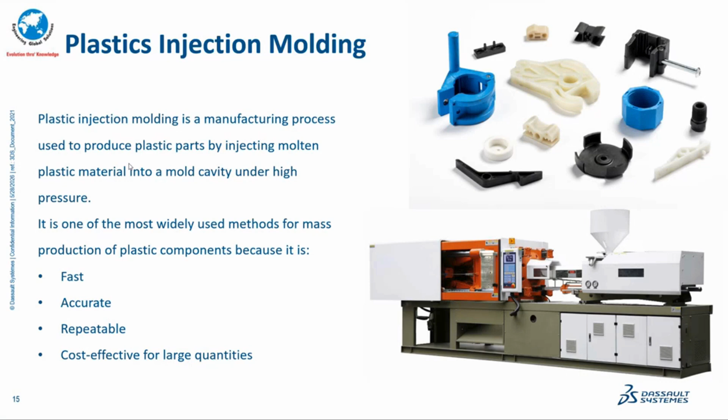What is plastic injection molding? Plastic injection molding is a manufacturing process where molten plastic is injected into a mold cavity under high pressure, cooled and solidified to form precise, durable parts. It is widely used in automotive, medical, electronics, packaging, and consumer goods industries because it enables high volume production with consistent quality and tight tolerances.

It involves various processes in mold design. A well-designed mold reduces defects and shortens cycle time. Material preparation directly impacts part quality and consistency. Uniform melting avoids short shots and flow defects. Injection is where design meets reality.

Precision here defines the final part. Efficient cooling reduces the cycle time and improves dimensional stability. From an ejection point of view, smooth ejection ensures productivity and reduces scrap. Inspection guarantees that simulation predictions match real world performance.

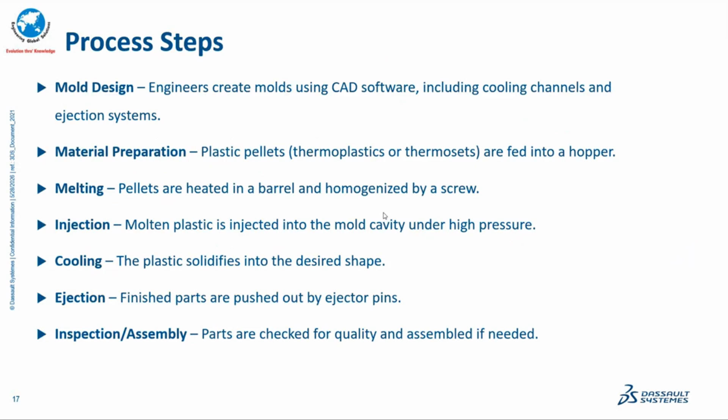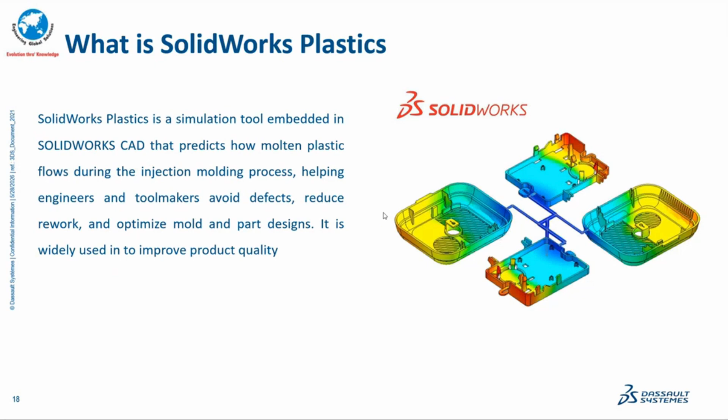What is SolidWorks Plastics? SolidWorks Plastics is a simulation software used to analyze and optimize the plastic injection molding process before manufacturing the mold and physical product. It works inside the SolidWorks environment and helps engineers predict manufacturing defects, improve the mold design, and reduce the development cost and time.

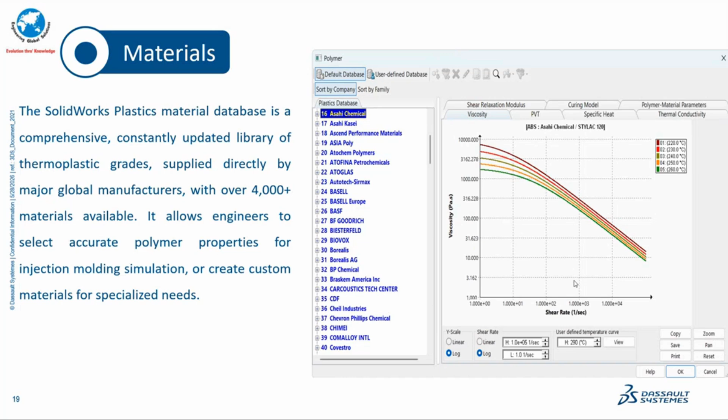Flow behavior captures the viscosity curves and melt flow index; thermal properties capture the conductivity and specific heat; and mechanical properties capture the moduli, shrinkage, warpage, and densities. Cooling fluid properties capture the mold cooling analysis.

We have a dedicated meshing tool along with SolidWorks Plastics. Meshing is a process of dividing the geometry into small finite elements connected by nodes. These elements help the software numerically solve complex engineering problems. In SolidWorks Plastics, we have a tetrahedral hybrid mesh, hexahedral mesh, automatic mesh, and also mesh control options like surface mesh density, refinement methods, and advanced controls. We will discuss each and every mesh type.

Tetrahedral hybrid mesh. It uses the triangular surface mesh as a basis for creating tetrahedral volume elements. It adds boundary layers of prismatic elements near the surface to capture the thin gap and flow behavior. Best for complex geometries and thin features where tetrahedral elements alone may distort.

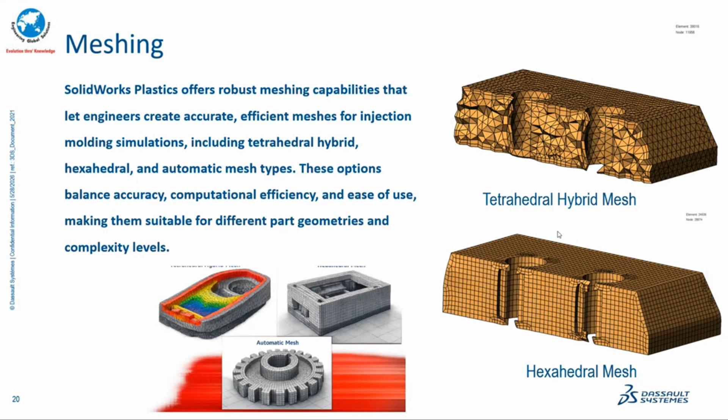Hexahedral mesh employs orthogonal hexahedral elements aligned with melt flow directions. It provides more accurate and efficient solutions when aligned with cavity geometry. Automatic mesh is the fastest option with minimal user intervention. It automatically assigns the mesh size based on the part dimensions and uses curvature-based refinement to capture small features.

This is the complete portfolio of SolidWorks Plastics. SolidWorks Plastics Standard is an entry-level injection molding simulation package embedded in SolidWorks CAD. It enables part designers to predict how molten plastic will flow into a mold cavity, helping them identify potential manufacturing defects such as weld lines, air traps, and short shots early in the design stages.

SolidWorks Plastics Professional is the mid-tier package in the Plastics suite, designed for tool makers and mold designers. It extends the capabilities of Plastics Standard by adding runner balancing, cooling analysis, and cycle time estimation, enabling engineers to optimize the mold layouts and improve tool room productivity.

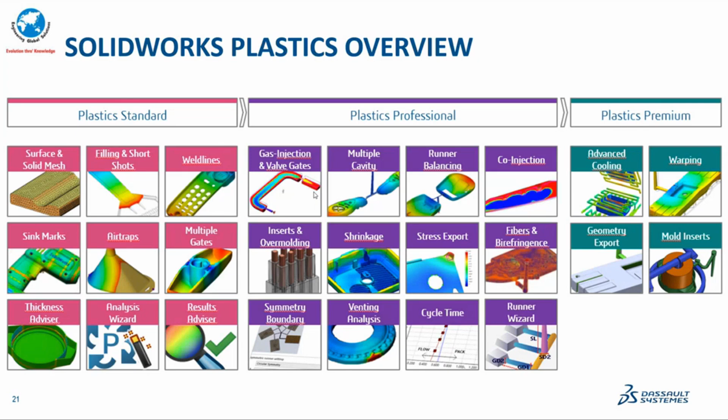SolidWorks Plastics Premium is the highest tier package in the SolidWorks suite. It includes all capabilities of Standard and Professional, plus advanced warpage predictions and full integration of part, mold, and process analysis.

In this live demonstration, I will showcase how SolidWorks Plastics is effectively used by both plastic part designers and tool room engineers. We will explore its user-friendly interface and highlight the wide range of capabilities it offers, from predicting the flow behavior to optimizing the mold performance, so you can see firsthand how it streamlines the design and manufacturing workflow.

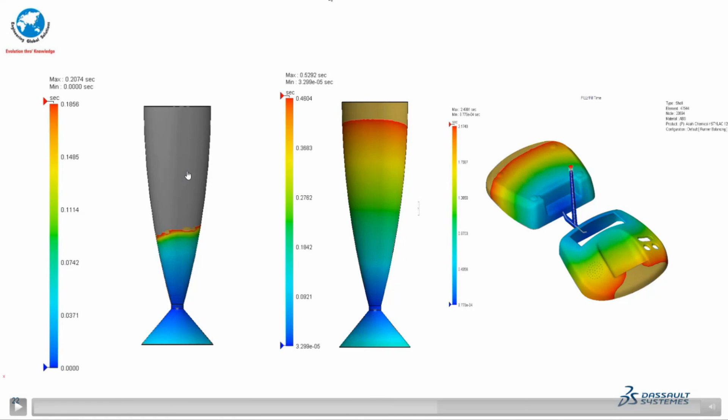Now we are opening the model in the SolidWorks interface, where you can design the 3D geometry. For this demonstration, the model has been defined with a thickness of 0.6 mm. Next, we are adding SolidWorks Plastics into the SolidWorks interface to simulate and run the analysis. The key advantage here is that both design and simulation are integrated within the same environment, meaning if any changes are required, you can quickly redesign and rerun the analysis without leaving the interface.

In this step, we select the polymer material from the SolidWorks Plastics material database. The software contains a large library of commercial plastic materials from different manufacturers. Here we can see the viscosity curve and other material properties. The viscosity graph shows how the molten plastic behaves at different shear rates and temperatures.

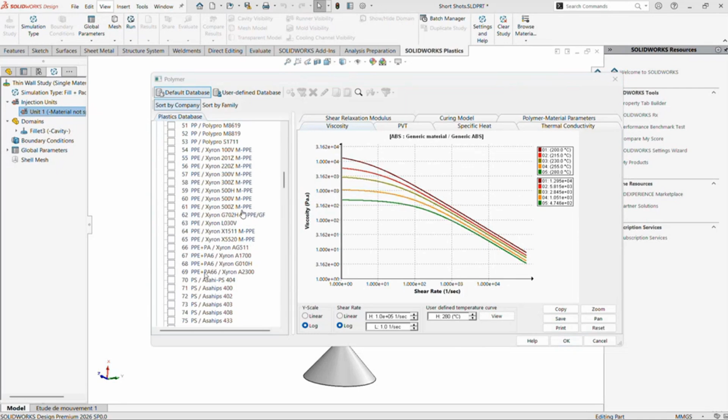Important material properties considered in the analysis include melt flow characteristics, thermal conductivity, specific heat, PVT behavior, and shrinkage behavior. Selecting the correct material is extremely important because it directly affects filling time, injection pressure, cooling performance, and warpage prediction.

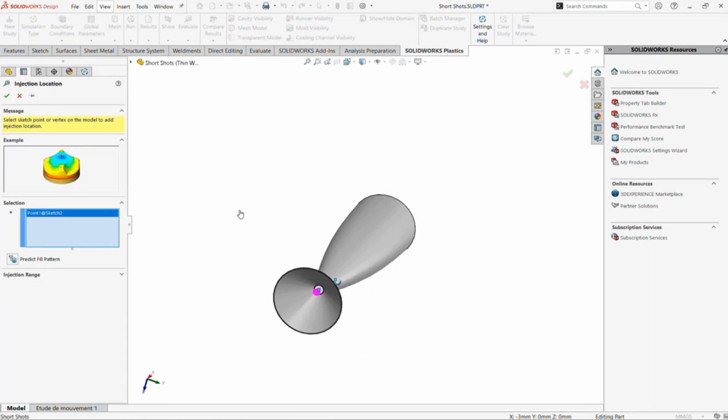Next, we define the gate or injection location. The gate location determines how molten plastic enters the cavity. In thin wall components, the gate placement is especially critical because flow resistance is higher due to the reduced thickness.

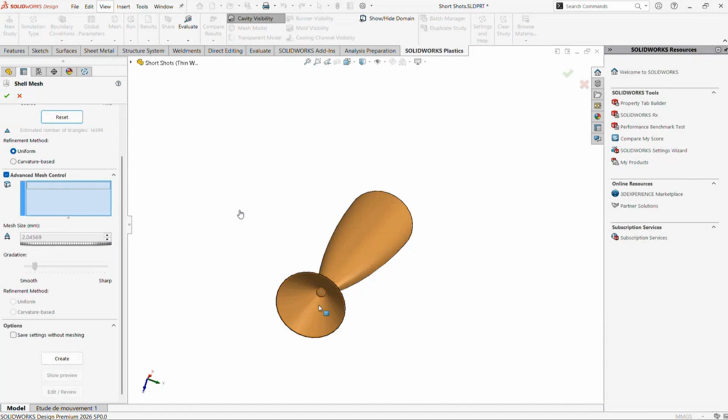And we are going to mesh the model, meshing the geometry into small finite elements for numerical calculations. For thin wall studies, shell meshes are commonly used because they effectively capture the flow behavior across the thin sections. For the injection location, I am creating a local mesh or a fine mesh to capture the behavior.

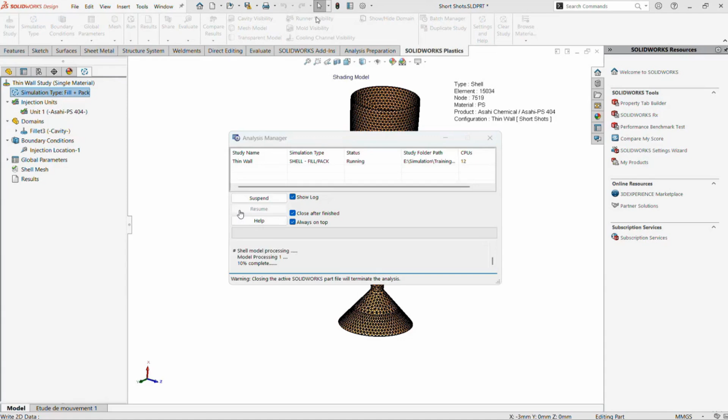After the gate location is settled and the meshing is done, we will run the fill analysis. The software calculates how molten plastic flows through the cavity over time. During the fill analysis, the solver evaluates the short shot behavior, cooling time, and running times.

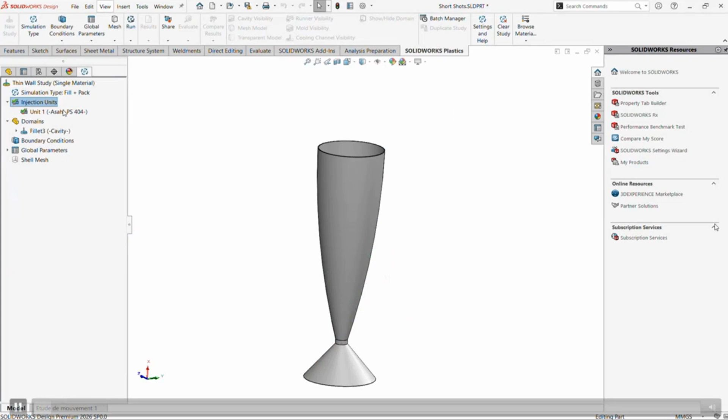The solver shows a short shot warning, that is when the molten plastic fails to completely fill the mold cavity during the injection. When the wall thickness is too small, molten plastic cools and solidifies quickly before the cavity is completely filled.

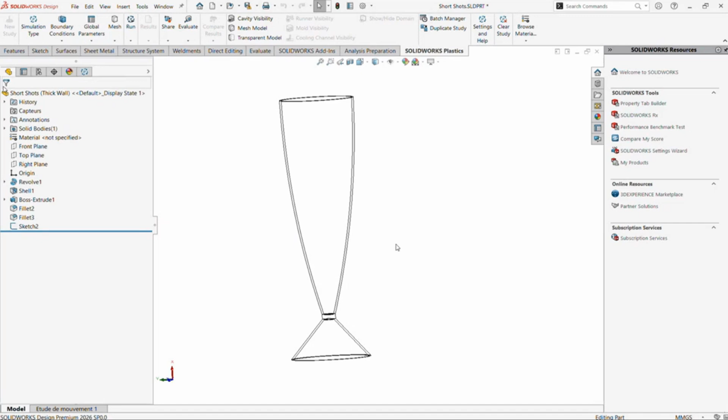Due to the short shot issue, we are revising the design so that I change the configuration from thin to thick. The thickness is being increased from 0.6 mm to 1.2 mm. As both interfaces operate in the same environment, design changes allow the analysis to be completed quickly and efficiently, significantly reducing the pre-processing time.

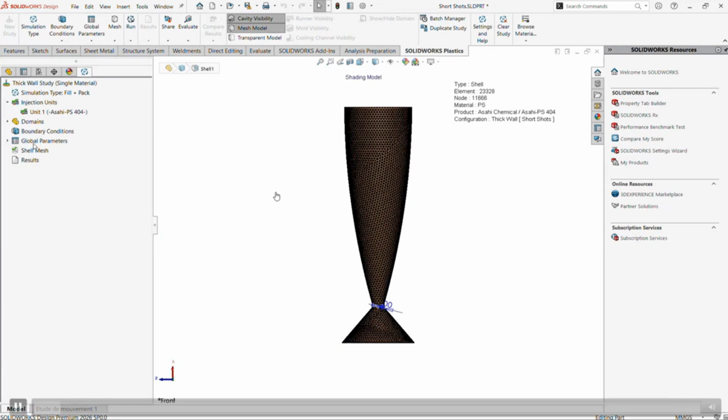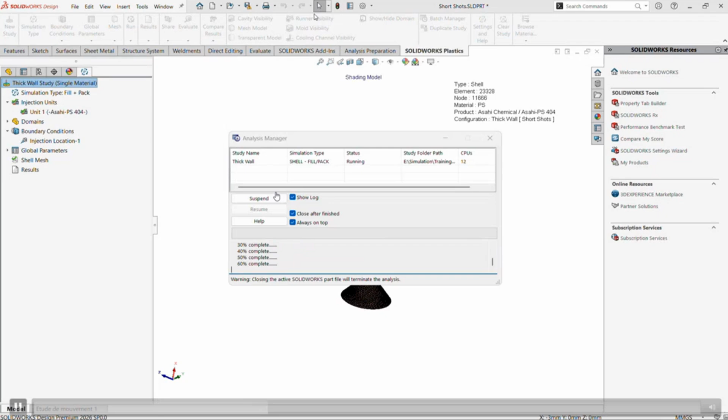We can run the simulation at the thickness of 1.2 mm by placing the injection location, remeshing the part, and rerunning the analysis. During the run, the Analysis Manager shows how the solution is converging. By rerunning the analysis, it will live showcase how the molten plastic is filling into the cavity. It shows in real time how the plastic fills the cavity after completion.

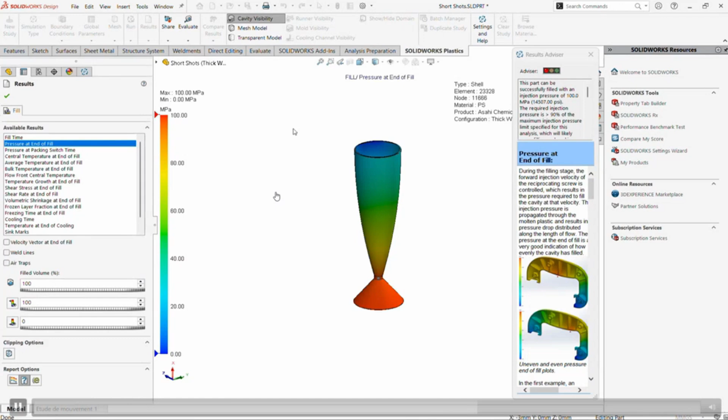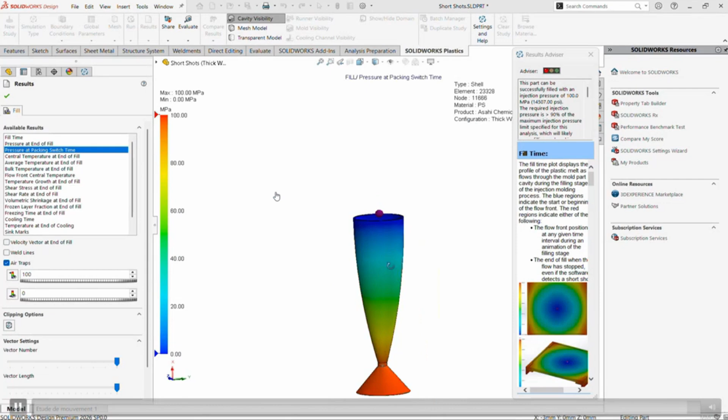The results allow us to check the pressure at end of fill, evaluate whether the part is easy to fill or not, evaluate whether the filling time is exactly mapped by the analysis software, and examine the cooling behavior. We can then assess the temperature at the end of cooling along with the potential sink marks, air traps, and weld lines. It will showcase how the behavior happens when the plastic is injected into a cavity.

Next, we will jump into the multi-cavity analysis. A multi-cavity plastic analysis in SolidWorks is a powerful approach used by tool designers and mold makers to evaluate how molten plastic flows into multiple cavities within a single mold.

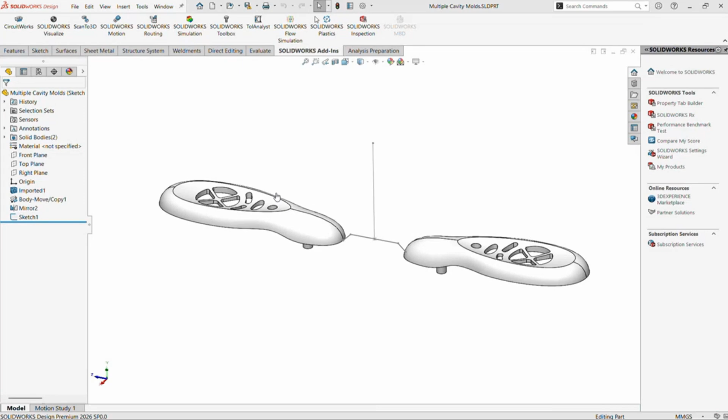Instead of analyzing a single cavity, these methods simulate the filling, packing, cooling, and warpage behaviors across several cavities simultaneously. It helps engineers optimize their runner balancing, gate placement, and cooling channel design to ensure uniform filling and consistent part quality.

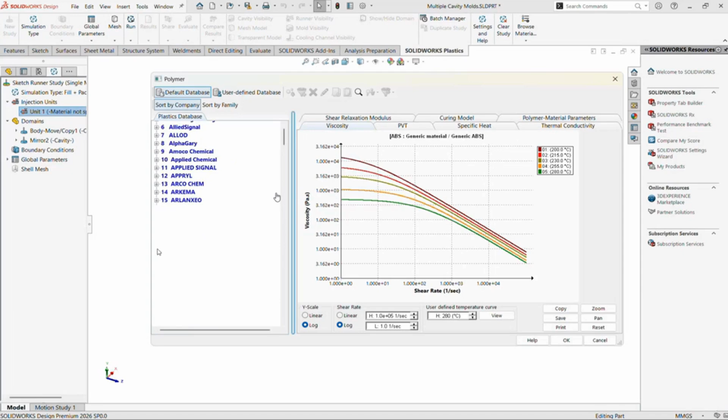We are now adding SolidWorks Plastics to simulate the multi-cavity problem and creating a new study for this analysis. Next, a polymer material is selected from the SolidWorks Plastics material database. Material properties such as viscosity, melt temperature, shrinkage, and thermal conductivity directly influence the flow behavior and filling performance. These properties are editable, and it can be done in the SolidWorks Plastics interface itself.

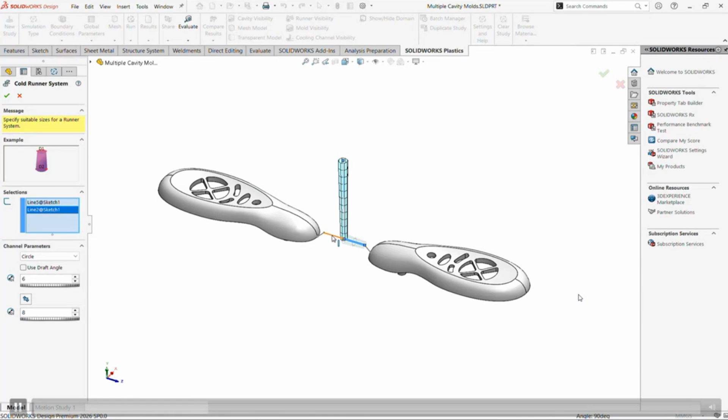In the next step, we are defining the runner and feeding systems. In the domain, it shows two cavities. We have hot and cold runners for this. I am selecting the cold runner. Here the runner and sprue geometry are generated. The runner system carries the molten plastic from the injection nozzle into each cavity. The dimensions of the runner affect the flow resistance, pressure loss, filling time, and cooling performance.

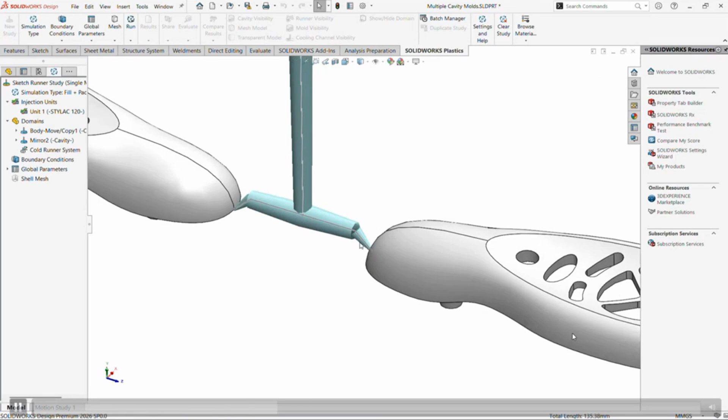By selecting the sketches for the runner, we can directly create the runner 3D model itself in the Plastics interface. It is a major advantage for us to exactly capture how the runner system will be created. Next, the injection location or gate position is defined. The gate acts as the entry point for molten plastic into a mold cavity.

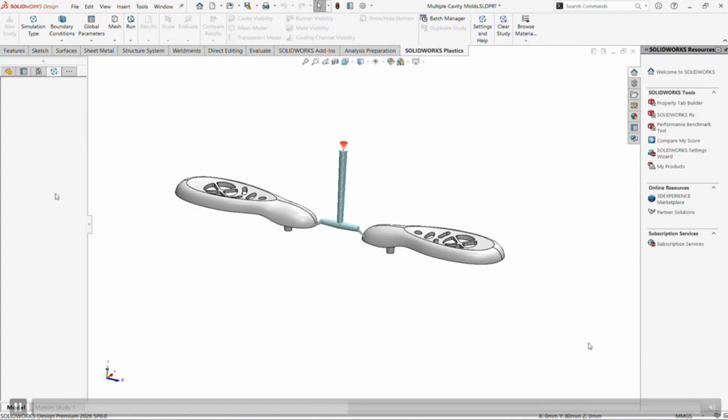By defining the injection location and runner systems, we are going to mesh the model. Now the model is meshed for the simulations. It divides the geometry into small finite elements that allow the software to calculate the flow and thermal behavior accurately. A finer mesh improves the accuracy, especially near the gate, thin sections, and complex geometries.

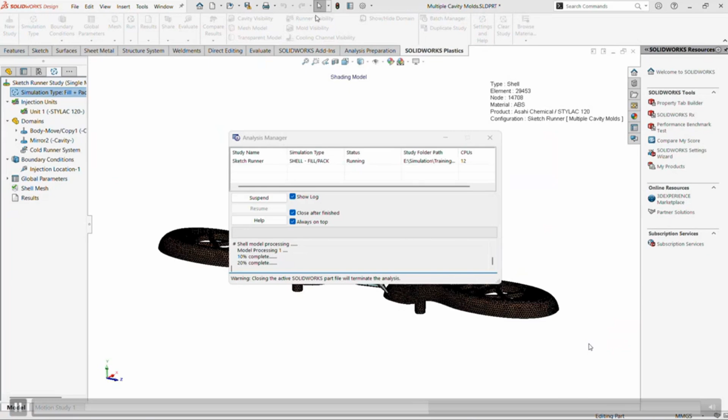After defining the process parameters, the filling simulation is executed. The software calculates the flow front positions, filling time, pressure distribution, and temperature variations. It will show you live how the plastic flow is injected in the cavity.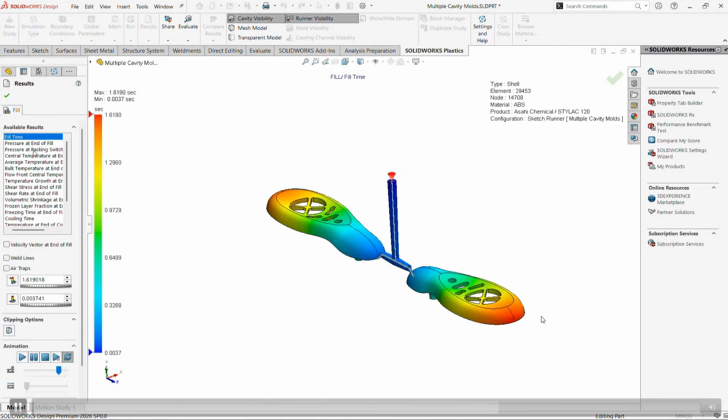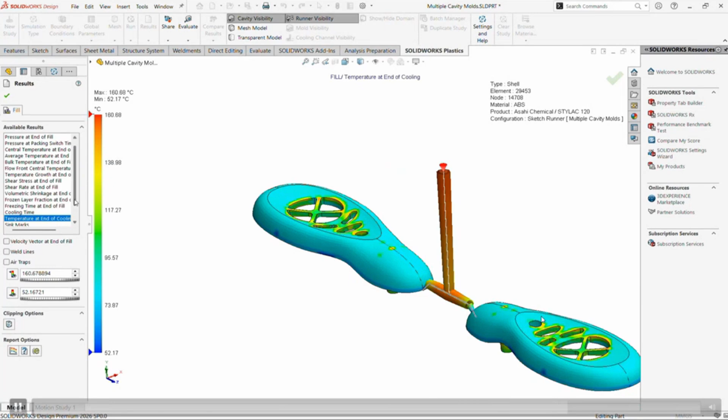In the post-processing results, we can see how much time it takes to fill the plastic mold, pressure at the end of fill, what is the maximum cooling time required to cool the hot molten plastic, and vectors showing how the plastic flow happens in the cavity. It will show us vector plots, and if there are any weld lines created or not, we can exactly capture that also in post-processing.

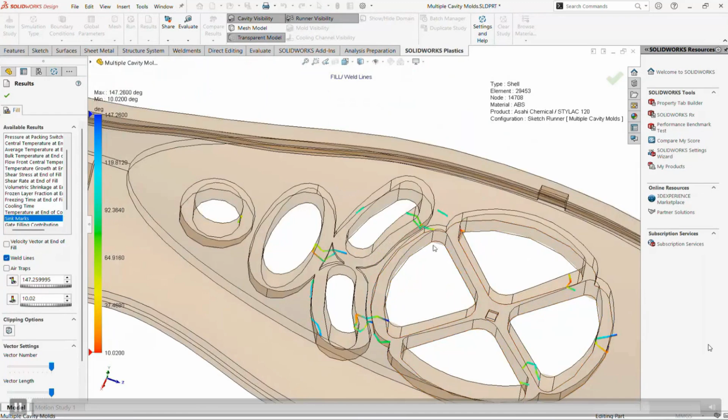We analyze the simulation results. The study helps to identify whether both cavities are filling uniformly, because the two cavities are placed in a single domain, so we need to check that the two domains get filled evenly at the same time, in the same uniform directions. The filling time consistency and weld line locations can also be captured in post-processing, and any air traps or defects created in the plastic we can also get there.

The major applications are in injection mold design validation. It is used to validate mold designs before manufacturing by analyzing the filling patterns, pressure distributions, cooling behaviors, and warpage predictions. This helps reduce costly mold rework and production issues. Multi-cavity mold analysis: engineers use it to balance the runner systems, ensure uniform cavity filling, reduce the cycle time, and improve part consistency. It is very useful for high volume manufacturing industries.

In automotive industries, it applies to simulations of dashboard components, clips and connectors, bumpers, interior plastic trims, and air vents. It helps automotive companies reduce product weight and improve manufacturability. In consumer product manufacturing it is used for plastic containers, bottle caps, home appliance parts, toys, and packaging products. It ensures better surface quality and reduces defects.

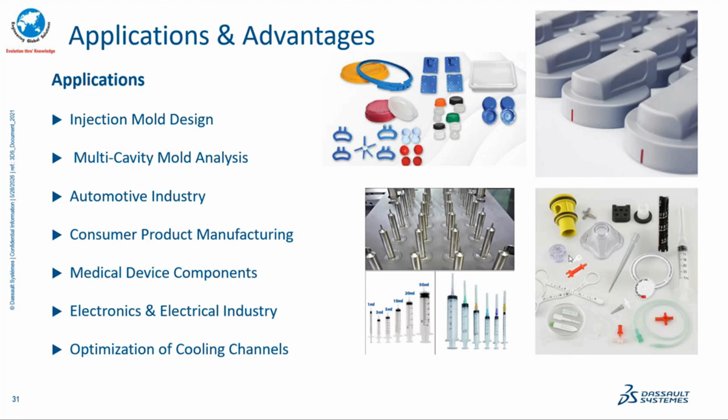The main advantages will be reduced mold trial costs. Simulation predicts defects before mold manufacturing, reducing physical trial iterations. It helps save tooling cost and minimize rework. Early detection of manufacturing defects can identify air traps, weld lines, sink marks, short shots, and warpage before production starts. Improve product quality: optimize the gate locations, runner design, fill balance, and cooling systems, leading to better molded part quality. Shortens product development time: engineers can validate the design virtually instead of waiting for physical prototypes. It results in faster design approval and faster product launch.

Integrated with SolidWorks. It directly integrates inside SolidWorks and allows easy geometry updates. CAD designers can easily update their designs to the Plastics interface: faster workflow, simple design modifications, no need for separate CAD conversions. User-friendly interface: easy for CAD designers, mold designers, and manufacturing design engineers to learn and operate. Accurate flow and cooling predictions: provides realistic analysis for melt flow, cooling time, injection pressure, and clamp force, which improves process optimization.